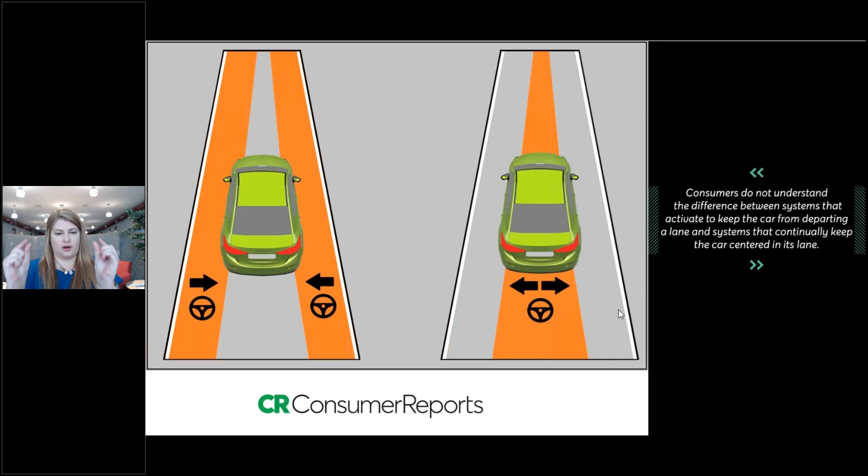And so these boundary boxes also that you can see, these orange lines, vary widely across the industry. They may be wider or narrower. Perhaps on the left image, it may be a very narrow orange line that's just touching those lane lines. And so you have a lot more play in the lane before the system activates. And so it's pretty clear that there is a wide spectrum of how these systems perform.

And all of this is being said that as the technology is advancing, we have begun really assessing these systems stacked up against each other, regardless of which methodology and engineering they've used to approach building these systems. And we're finding that consumers are not necessarily wanting systems that don't perform well, and the expectation is that the system is going to try to keep the car centered in the lane. And so systems that may have a narrower band on the left type of system are potentially not helpful for a lot of consumers.

So we are testing these with the goal in mind that we're looking for a system that is keeping the car pretty well centered in the lane. Of course, some deviation in play is necessary if you're going around a large truck or a pothole, but that's kind of the goal of where we are in our testing and the logic behind it. So I wanted to just set that record straight real quick, and we can go on to the next slide.

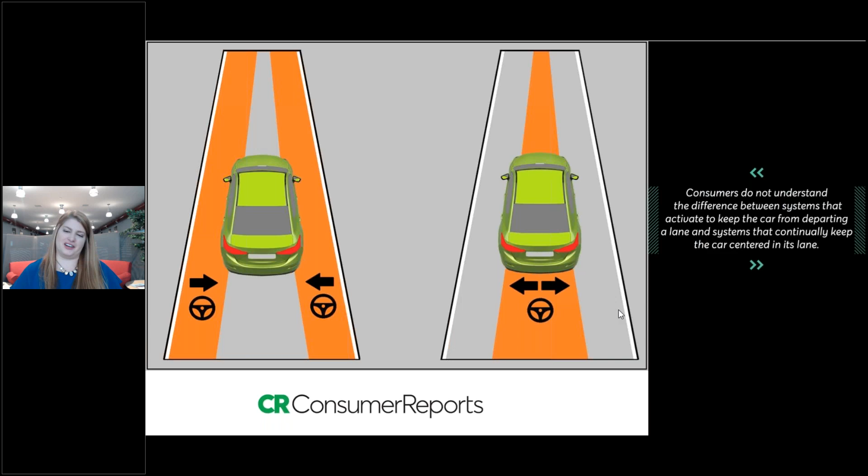Obviously, we're looking for systems that are competent enough to be able to qualify to be in this assessment. So ones that can at least try to hold the vehicle within the lane and have adaptive cruise control, which are basically the building blocks of self-driving. I know there's a lot more to it and a lot of nuances, but we are assessing the capability and performance along those lines of what I explained with the lane keeping systems before.

And then our next category is ease of use. This score is looking at the controls of the vehicle in terms of how easy it is to engage, how easy it is to adjust perhaps the speed or the abilities of the vehicle, and also looking at the displays. So what kind of feedback is the system giving to the driver about what mode, what state it's in, what it's seeing? If it's making calculations, are you able to check those against the real world and what you see?

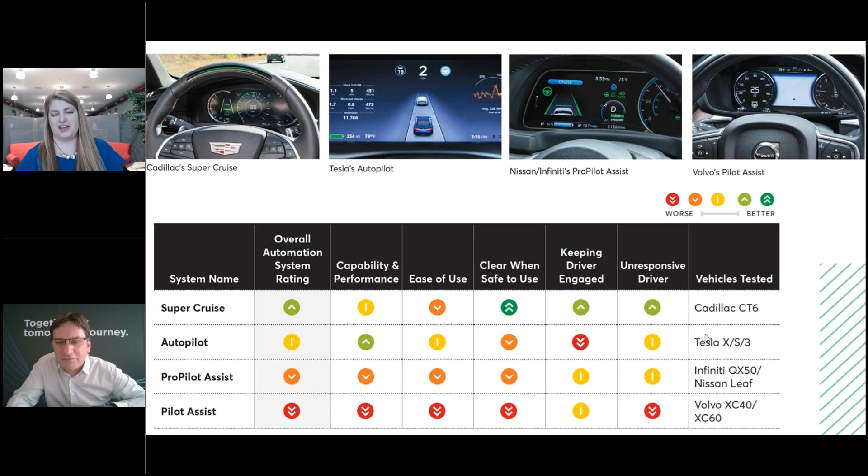All that being said, these scores here, again, are from 2018. And we can go to the next slide here. Oh, it's missing. That's okay. It was just a pretty picture of the track that I took yesterday. But we are going to be publishing results of the next set of cars this fall.

There it is. And I just want to point out really quickly that we have been working with Euro NCAP, Richard, who will be speaking shortly. We want to ensure that there is harmonization within testing organizations, whether that's within the United States or outside of the United States as well. The manufacturers may have difficulty designing systems with all of the crazy regulations and differences in what these systems are allowed to do on the road and aren't allowed to do.

And so we have decided that it is really important to establish this relationship and work together in order to set metrics and recommendations for the industry in a cohesive manner to hopefully make it safer for everyone, get all those different perspectives from across the world, and also really to ensure that manufacturers are able to create these systems that have been well vetted and aren't spending their time creating multiple systems that aren't as good. So that is where I will end, and thank you very much.

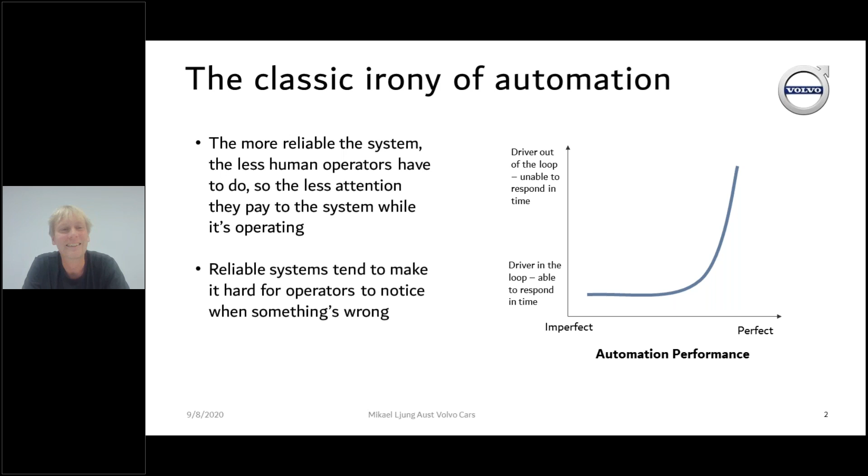Now, for long, it has been implicitly assumed in this business that as long as you keep your eyes on the road and hands on the wheel, you're going to do something if you run into trouble, even if the car automatically took you to that point. Because braking and steering away from objects in the road is such a fundamental and automatic behavior that nothing can really break that response. Unfortunately, it's wrong. So if we go to the next slide.

And the way you get here is that your perfectly self-driving car is following another lead vehicle, and the lead vehicle will cut out and go around this object. So what we really looked at in these tests is, what do drivers do? And very concretely, what do we need to do to make sure that they don't run into the balloon car or the bag of trash?

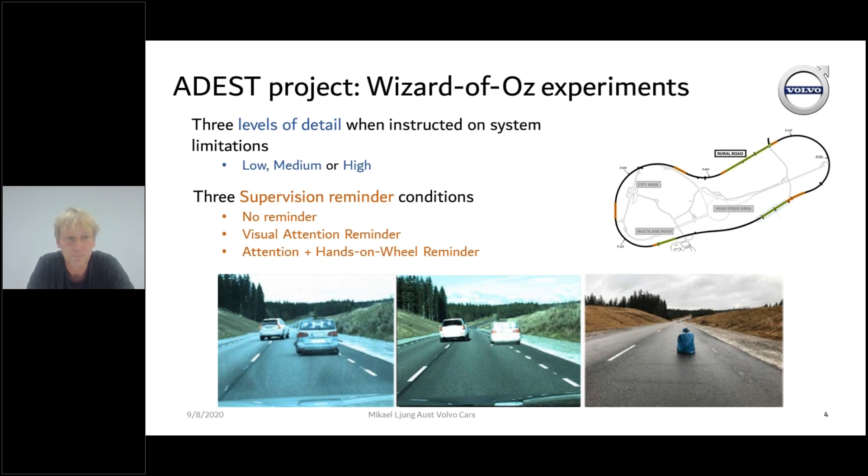So this is what we tested. 3 levels of instructions before you did your drive, 3 supervision reminder conditions. And what we looked at was, would anybody crash the car into this trash bag? So next slide. There we go.

Now, the interesting outcome of these studies was that 3 drivers out of 10 crashed in every condition. So low instruction versus classroom training, no change. Supervision reminders versus no supervision reminders, no change. 3 in 10 ran into this object, or actually let the car run into this object. That is a pretty high number and a little worrying.

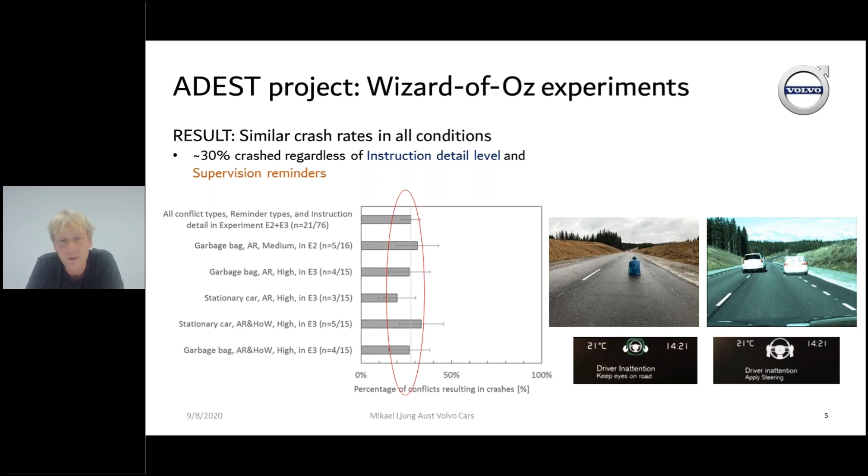And this is why we talk about designing driver assistance, not ride assistance. Because if this is a problem that may arise after half an hour of perfect driving, well, you get the picture. We can look at the next slide. So obviously, we had to ask the people who crashed, you know, what were they thinking?

And I should tell you, the people who participated in these tests viewed themselves as pretty capable and hardworking and good individuals in many aspects. None of them were really impressed by themselves that they let the car crash. They didn't feel good about it, and they didn't really feel they did their best. So it was not on purpose. They were rather ashamed afterwards.

But the ones who did crash, they all reported high trust in the automation to handle the conflict. So they could say, well, I just expected the vehicle to brake, or it felt very safe in this half hour of driving, so I didn't realize something could happen, or the vehicle was driving so well, so I couldn't really imagine that it would be unable to see something right in front of it.

These are pretty interesting answers, because you have to remember that half an hour before, they'd been told that they need to monitor for anything suspicious and deal with it should the car miss it. So in half an hour, you can go from that position to this, where you have a comment like, well, it was driving so well that I couldn't imagine it wouldn't brake. So we can go to the next slide.

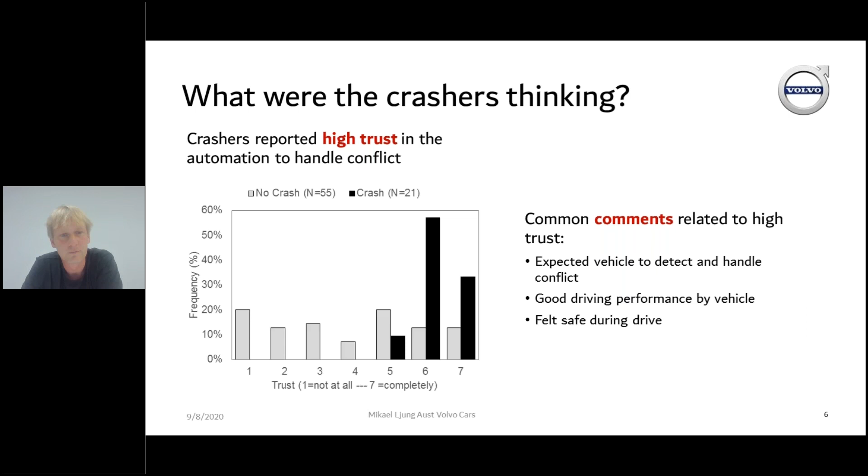So our takeaways from these studies is really that supervision reminders, like, you know, have your eyes on the road, have your hands on the wheel, they are a very good prerequisite for being able to do something, because if you don't look at the road, you have no idea what you're doing. Hands on wheel, maybe. People are pretty fast at getting to the steering wheel when it really matters, even if they don't have their hands there to begin with.

But this, what we call the automation expectation mismatch, it still develops if driving performance is perfect. So half an hour of really good driving means for some people, and I mean, this is not intentional, it's not like they decide, it's extrapolation from this performance. Even though they were told beforehand that this is not a perfect system, they cannot help themselves. They will develop this extrapolation that because the car is driving so well, it's going to deal with everything in front of it.

It's pretty much like if you're getting into a taxi at the airport. You know, if the taxi driver takes off and you see that this person can actually keep the car in the lane and the speed reasonably steady and the distance to the vehicle in front, then you automatically extrapolate and think that, well, if something happens, this driver is going to brake or steer away. So this expectation develops in people, even though they don't want to or shouldn't.

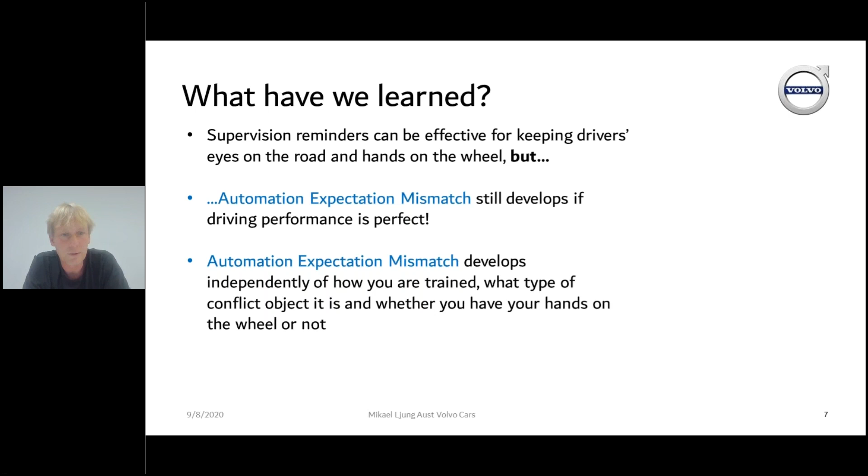Of course, the implication for self-driving systems is really twofold. You should either have a highly reliable system, really highly reliable, so go for full AD, or you need to be able to make sure that you can detect that the driver is out of the loop and then do something, you know, push the driver back in the loop somehow. And this is why we are at Volvo talking a lot about how we turn this into drive assistance or driving assistance rather than ride assistance.

Because of course, the best answer to this is really that you, as a driver, still feel that you're driving the car. You're not being driven. And if you're still driving, all your normal security measures and behaviors apply. And then the question is how we make that an offer where you still get something out of it for having the system turned on. That was this in a brief overview.

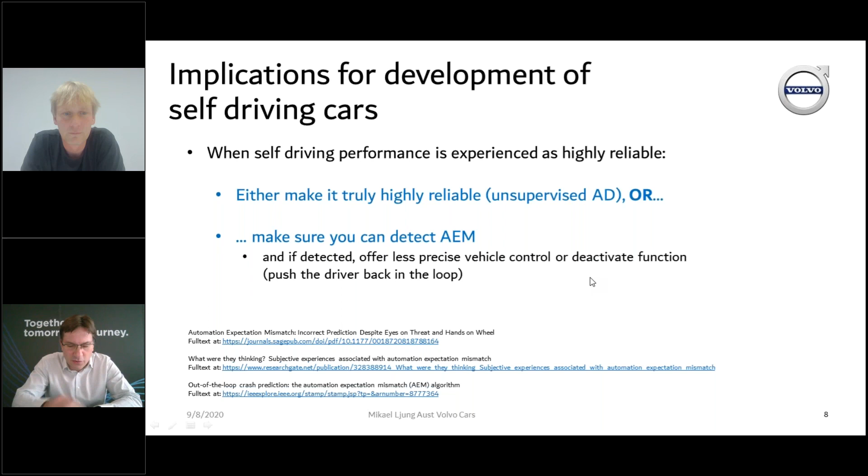Thank you, Mikael, for the presentation and for sharing the results of this interesting study. So what I understand from the study is that even though all the systems are there and also the monitoring, and drivers have been instructed, there are still crashes happening. And I was wondering, before we quickly look at the questions, how do you recommend now the car should be designed based on this detected AEM, since you mentioned that the prompts didn't work in your study? Sorry again, the prompts? You said that the prompts didn't work in your study?

Well, they worked to the effect that the drivers had their hands on the wheel and their eyes on the road. What it didn't do, so it's really, the problem is assuming that prompts lead to response. That assumption is wrong for some drivers. You will have your eyes on the road.

One behavior of drivers who were mentally checked out and crashed was that they were actually staring a lot more on the road than you typically do when driving. They had like 95% of their gaze time straight ahead on the road. They were definitely looking. And then when running into this conflict object, you could see their hands pull back to brace. So it was like they were in the passenger seat, only on the wrong side.

How would you classify the system you tested according to the SAE? That's probably like a level 4 or 5 because it did perfect automation on half an hour in terms of performance. But then, of course, we told them it was supervised driving, so maybe a level 3.

So Richard Schramm works for the European Euro NCAP assessment program, where he's technical director, and amongst other activities, he's the technical lead for active safety and automated driving. Before that, he worked at TNO Automotive, where he got involved in vehicle crash safety research and development in both passive and active safety fields. Richard, the floor is yours.

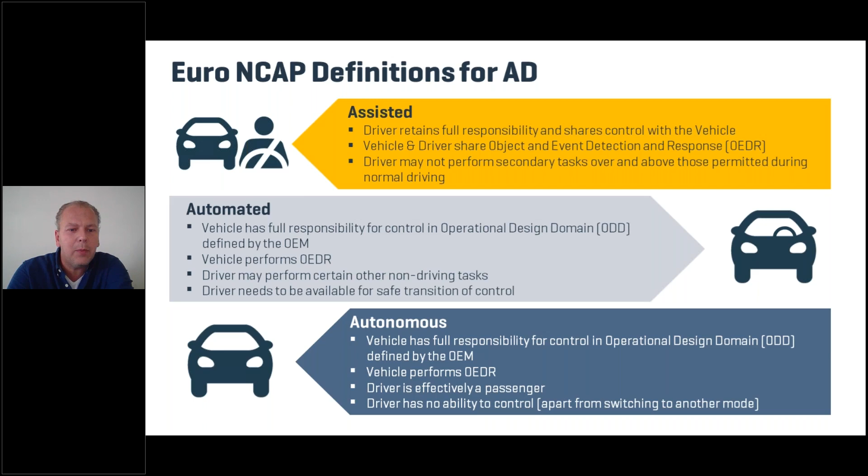So what are we going to do next? If you go to the next slide, and I think this is one of the success stories of Euro NCAP in general terms, we believe in writing clear test procedures and assessment procedures that will result in the performance and the system design we see as most safe. We set up a system where we really focus on this balance that we already used previously. So we want to balance the driver engagement and vehicle assistance. The more assistance you have in the vehicle, we don't mind, but it needs to be balanced by more driver engagement to ensure that the driver still knows its role.

Again, this all is still assistance systems where the driver is responsible. There's never a transition of control in this case. And as a safety organization, we believe that when the comfortable support by the system ends and finds its limitations, it shouldn't mean that the vehicle should not respond to the situation anymore. It should use its safety backup systems like AEB, lane keep assist, emergency lane keeping, to still keep the vehicle in control, maybe uncomfortably by harsh braking or harsh steering, but it should help the driver avoid a crash or mitigate a crash in extreme cases.

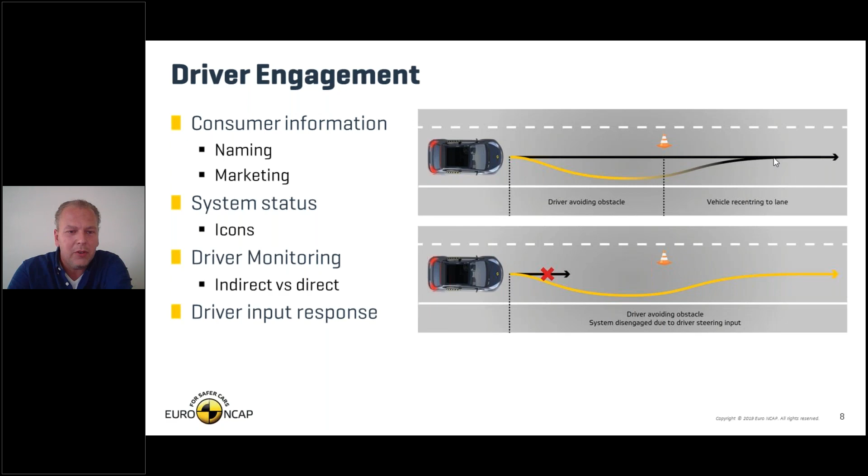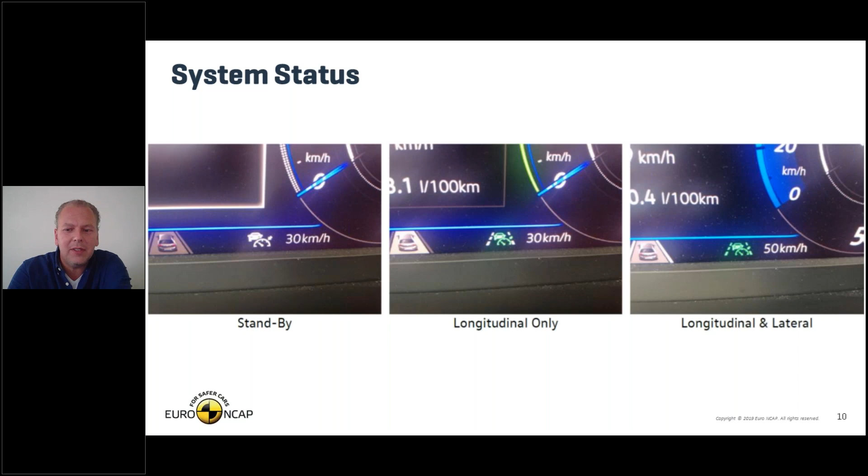So we go to the next slide. I think we can skip this one just for the sake of time. Also this one, system status, this needs to be clear to the driver where the systems are and how they are helping.

In-vehicle assistance, that's the next big area, pillar within the balance that we're trying to find: how much assistance does your vehicle provide? And that goes from, does the vehicle help you set the correct speed limit? Not only if it is the actual speed limit, but also if there are tight curves, crossings, roundabouts coming up, that the vehicle will already adjust your speed to an appropriate speed, which may be lower than the actual speed limit.

We're also looking at the ACC performance. That's a very large chunk of what we're doing. How does the vehicle respond? And in summary, we don't look at how well the vehicle does within 60,000 miles on a straight highway, and whether it will keep in the middle, like Kelly also mentioned.

We're specifically, and that's why we do all of our tests on the test track, looking at critical events. I think anyone can make a system that will be able to keep distance to a slower moving car ahead without a critical relative speed. And I think that's what some of our results show as well, that the moving objects are easy enough. So we put in stationary objects, late cut-ins, late cut-outs, to really put the systems to the test and see how they behave. Because those are the critical events where, if you have no driver engagement to the correct level, the vehicle will crash ultimately.

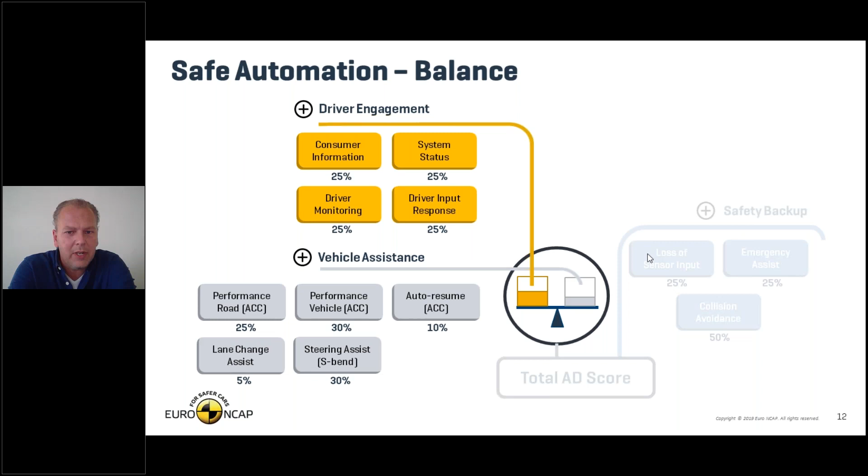And the reason for that is that we want to have the driver engaged in these systems, because again, and I cannot stress it too many times, the driver is still responsible and needs to drive the vehicle. But in cases where the vehicle assistance may end and unfortunately the driver isn't paying proper attention, we still want the car to do its uppermost best to help the driver avoid the accident or the collision. And I think that's why we're doing it in the safety backup system. So if you go to the next slide. Yeah, I think we can skip this one.

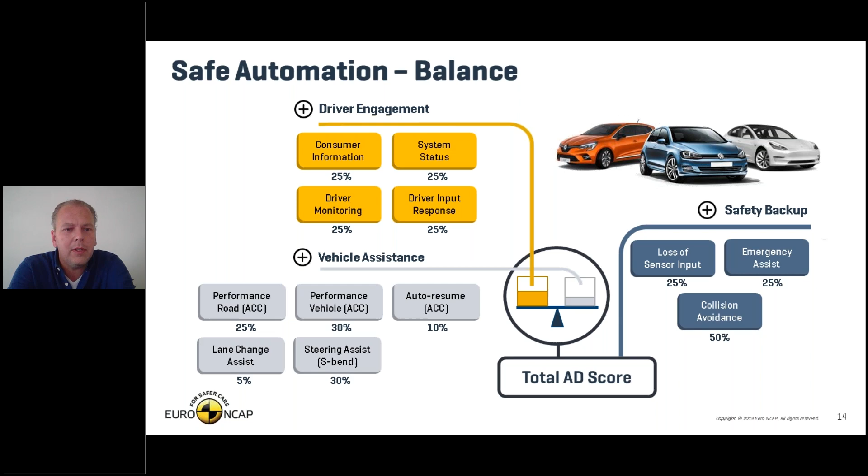Yeah, so the safety backup is then the second pillar in general that adds to the total AD score that we give to a vehicle. For there we have loss of sensor input, emergency assist, and collision avoidance. If you go to the next slide, I can give you a slight hint on where these items look into.

So loss of sensor input is effectively what does the system do and how does the system inform you in case there is a buildup of ice, heavy snow, where the radar or camera will not see anything. Now, at the moment, we are doing this in a very blunt way. We simply cover the sensors instantly, which is a bit of an unrealistic way of covering, but we get a first hint of how these systems respond to this.

In emergency assist, we are very keen, and this is a very big proportion of our score as well, that as soon as the regulatory warning sequence has timed out, we want the vehicle to keep supporting the driver, because you can do two things as a vehicle manufacturer. You can either assume that the driver is making misuse of the system, which I cannot believe how you can do after a very annoying warning sequence. So if the driver is still out of the loop and not taking back control after the whole warning sequence, which is legally required in Europe,

we believe that the vehicle manufacturer should assume the driver will never come back. He is physically not fit to take back control, and the vehicle should bring itself to a safe stop. Even though we are limited to do this within lane, that's the best way forward, because simply releasing the steering and longitudinal control of the vehicle means that you have a 120 kilometers an hour bullet uncontrollable on the highway, while the vehicle has means of slowing down itself and staying within the lane as the best alternative after the driver is out of the loop.

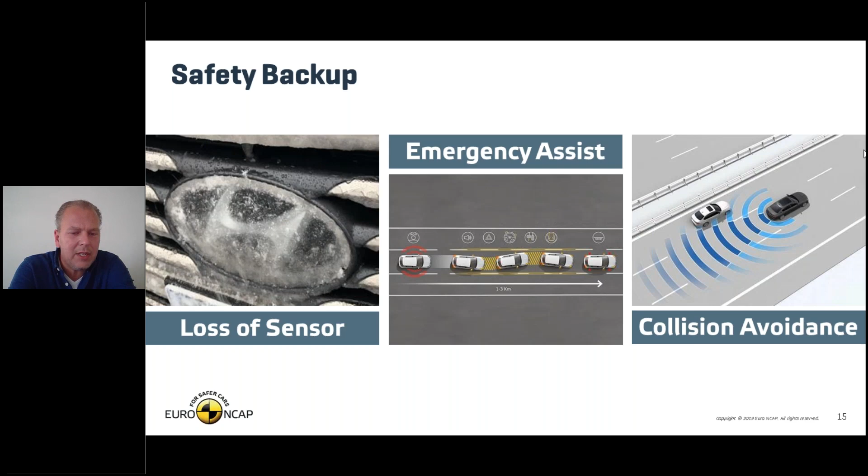we will publish our second publication on this with the accompanying protocols, the test protocol and the assessment protocol, hoping the manufacturers will pick this up and take this into account. And we are in close relation with the manufacturers. They have been on our working group to develop these procedures and equipment. And again, like last time, we have a couple of newcomers. So Peugeot, Renault, and VW weren't in the first release, but we also have other vehicles from the same manufacturers from the first release in our publication on the 1st of October to demonstrate the quick development of these systems as well.

So only 2 years, but a new generation vehicle comes typically with a new system that, I can give you a heads up, has a significant change in system performance already. And also the newcomers are coming up with, let's say, affordable cars that you and I can buy, offering these systems, not only very high-end vehicles that are unfortunately not within my budget. So with this, I hope to have given you a sneak preview and a hint to look at our website on the 1st of October when we launch the second batch of results on this topic.

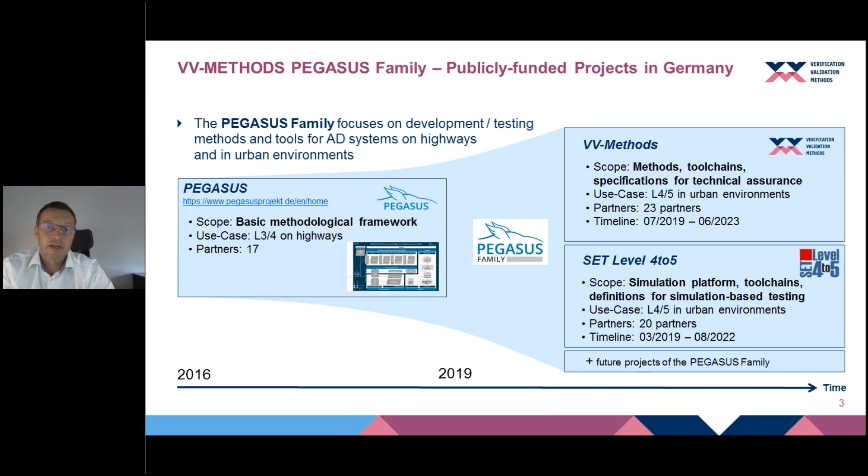So VV Methods focuses, again as Pegasus, on the methods of level 3 to 5, and especially with the focus on industrialization. And SET Level 4 to 5 was formerly planned as a part of the project, a simulation part, and we split it off for several reasons. So we have 2 projects, but we base on SET Level, which gives us the simulation ability in our project VV Methods. So the focus now is VV Methods on its own, and I come to the next slide, please.

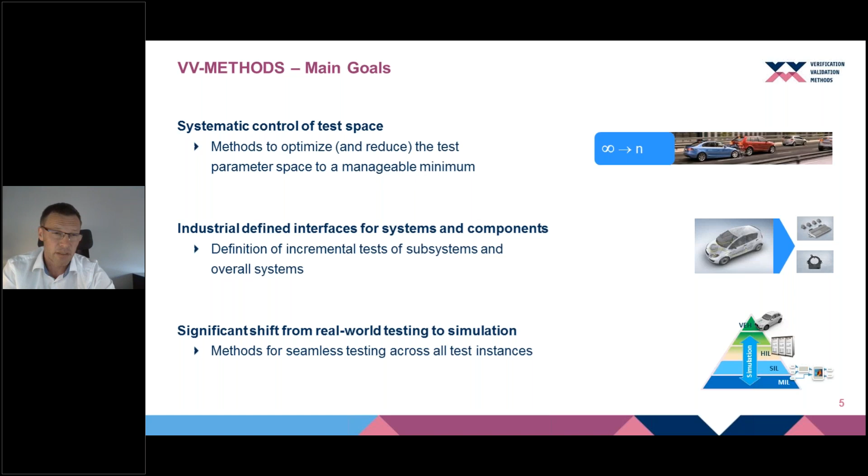When we take the goals one step deeper, now you see the V model and you see the 3 goals again. And the first goal, how do we reach this? By understanding the traffic phenomena, we will achieve several clusters of tests, which we then can say are finished, or that under certain conditions, this is tested enough. And doing this, we have to involve the law perspective into these considerations.

And what we get out then, for example, is kind of a nominal behavior. Maybe you know this from the RSS methods and others. So what is really asked, what is claimed of such a vehicle to behave, because this is not certain at the moment. And let's now look at the next goal, goal 2, industrial interfaces. I come to this in a result later on, the argumentation.

We need a systematic approach of breakdown of the claims we have in law and for the driving task for the nominal behavior. If we have this, we can do component exchange, we can do variant release, and we can enable that different manufacturers contribute to one car. This is also, as I said, a main instrument for scalability, for industrialization.

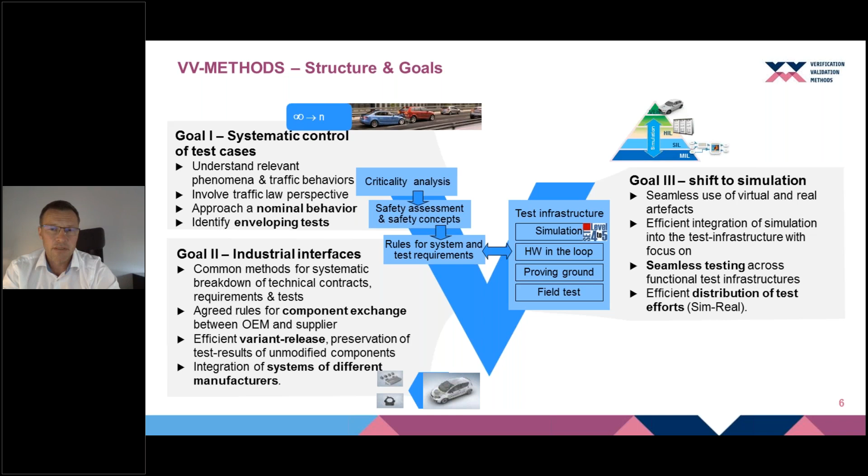This is also started in Pegasus as the safety argumentation. We consider the safety argumentation as the structured backup framework for the release of the vehicles. And because of that, the open context gives us a very complex requirement. We have to structure this, and we have to structure this over the industrial stakeholders. So here you see 3 layers. This is the first element.

The layer above, we call it the social or traffic layer, defines the claims and bundles the claims on the one hand side from the real traffic, where we get data, and the laws. For example, NHTSA and other requirements, Ethic Commission in Germany, what we have to cluster and to understand what is behind these claims. Can we put them together to have a common understanding what is actually asked from the society to the behavior of our vehicle.

And then you see, this is still in the definition phase. We come to a technical layer. The technical layer then is differentiated by the design of the vehicle, for example, the ODD. In this layer, then you define the ODD, and if you have the ODD, we come to the level to break down the requirements in form of contracts. We call it technical contracts. And these contracts then have to be decomposed. I come later to this. You see here, for example, we put it in function, component, and distribution. And then we say, okay, this function we decompose into planning, actuation, perception.

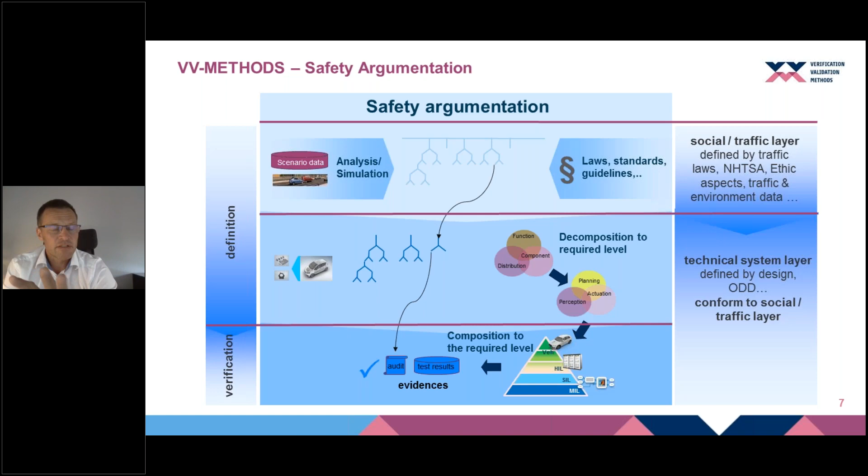And then if we have defined what we really have to explain to a car, then we come on the last level. This is where we get the evidences in the test infrastructure below. And you see here on this side, for example, that not only, let's say, simulation or data can be an evidence, also an audit is of course an evidence, as you know, from the three pillar approach of UNECE. This is all included as the main structure. Next slide, please.

I want to give a kind of short introduction about what we are working on in this safety argumentation. I told you that between the first and the second layer, there is a definition of the vehicle, the ODD, for example. But the question at the moment is what is the format, what is the structure to define such a vehicle? Because a lot of knowledge, preconditions, assumptions are in there to define a vehicle. And what of these assumptions has to be proven, and in what hierarchy and format it has to be defined. For example, a functional architecture can be used as such a framework. And then later on, you see the decomposition part of the contracts.

What is really important for us where we're working on is, of course, the methods already said, but really important are quality metrics, common quality metrics, which are part of the project to define what we really define there. A common language, as Kelly and the others also mentioned. We have, of course, the same thing, but one level deeper, not only the function. We want to define, for example, what is an error, on which level, and so on. And all these final technical definitions, what we need to define contracts.

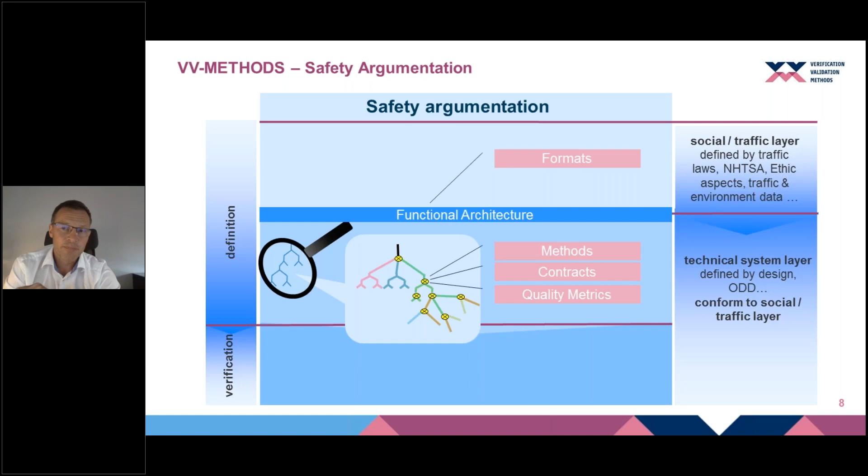I want to explain why we chose the safety argumentation as a systematic structuring element for our project from Pegasus. One is that the open context and the complexity it brings has to be covered together with the law perspective. And if we do not cluster it and structure it, we always will stumble with law conditions and other safety conditions. And if this is not structured, it is impossible to release such a car in this high complexity.

And next thing is using these technical contracts, you see assumptions and guarantees. We use assumptions and guarantees because typically every contract or every technical definition we do under certain assumptions. This is what we have to fulfill, and we have to say exactly what is the guarantee. This also enables us, for example, to have the scale effects, industrialization effects, because then this is a common language, for example, for tiers such as Bosch, to cover such requirements.

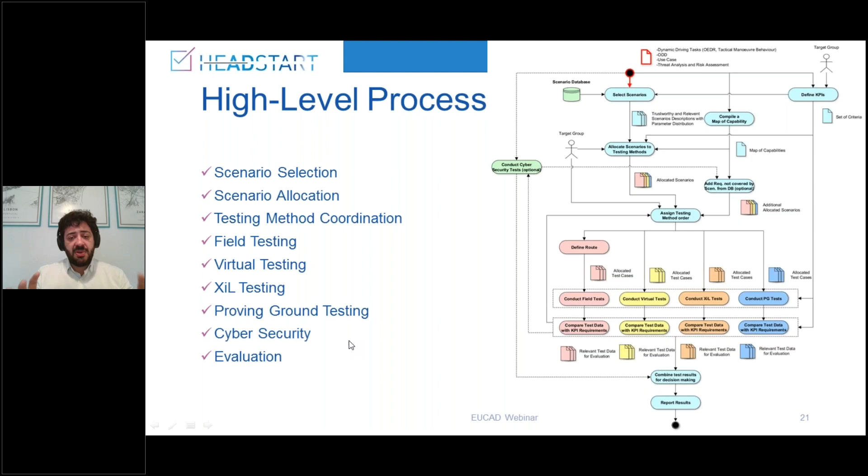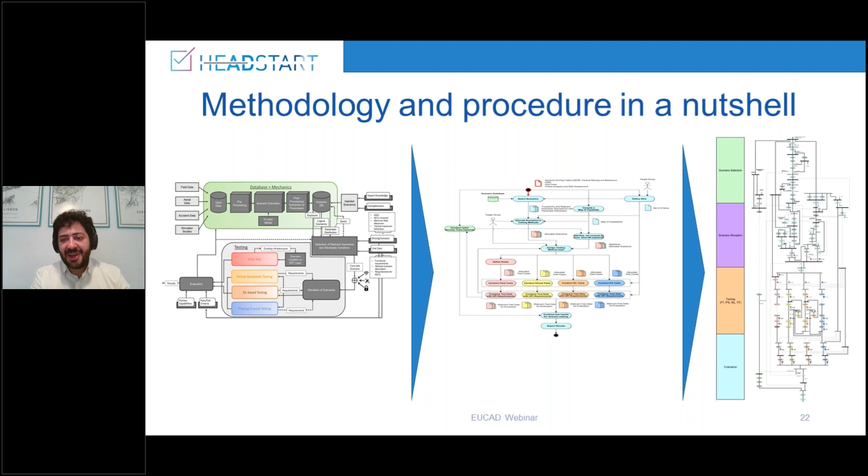So following all this approach, you finally get to the report results of the different testing. And here we have included all; you will see they're very similar to the methodology I just explained, but they are now more detailed. So next slide, please. Yes. If we move on, we have the methodology, we have the high-level process, and on your right, being very small, you have what would be the complete HEADSTART procedures that should be done for a whole vehicle, for a driving function validation.

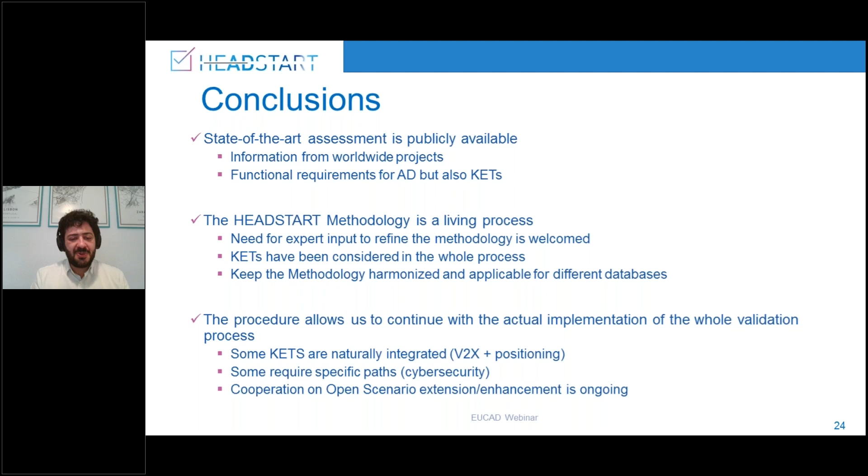Next slide, please. And next steps for the project. As I said, we are now starting the process of bringing all together into something physical that can be demonstrated. So this is the work that we will do in the next months, and finally next year, and of course this will be announced in advance, will be the demonstration. We have different use cases within the project, and we will make a demonstration of the methodology and the validity of the methodology itself. These are all planned in the second semester of 2021, next year.